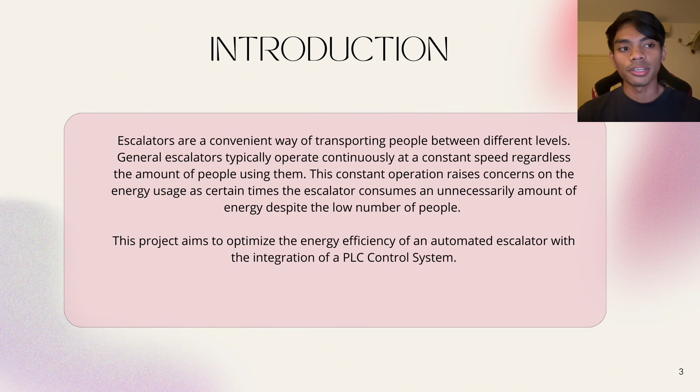At certain times, the escalator consumes an unnecessary amount of energy despite the low number of people actually using the escalator. So this project aims to optimize the energy efficiency of an automated escalator with the integration of a PLC control system. So the first problem statement is that conventional escalators run continuously, which will technically lead to wasted energy, especially during off-peak hours.

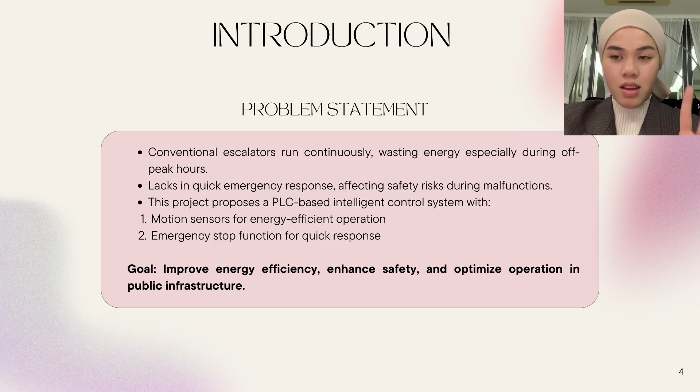So the second problem statement is that conventional escalators lack quick emergency response, which will affect the safety risks during malfunctions. So this project proposes a PLC-based intelligent control system with two features: first, the motion sensors for energy efficient operation, and the second feature is emergency stop function for quick response.

First objective, to integrate motion sensors to detect motion and activate or deactivate the escalator accordingly. Second, to reduce maintenance costs and mechanical wear. Third, to develop an intelligent control system using PLC. For design capabilities, first, motion sensors to detect user presence. Second, PLC control to ensure precise timing.

Third, timed delays prevent unnecessary restarts. Next, user-friendly reset to allow manual reactivation. Next, cost-effective and energy efficient to reduce power consumption and improve the system longevity. Last but not least, smart automation to enhance the operational efficiency.

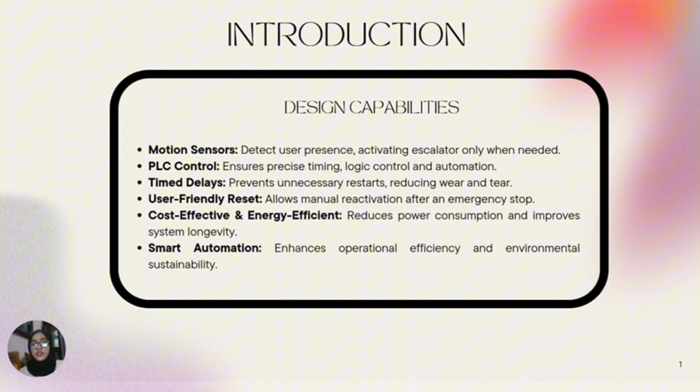So the first article, which is Programmable Logic Controllers, Principles and Applications, tells us about why PLC is a good relay system compared to the old relay system and its main parts that have been used in PLC. So the second article is the evolution of programmable logic controllers in manufacturing. In this article, it tells us how PLC has improved over time.

PLC, Programmable Logic Controllers, Principles and Application, but this time is more specific to our topic, which is how PLC technology is used to control escalators. In this article, we learn how PLC helps save energy in escalators, how emergency stop can be used, and also how sensors detect people that are coming to the escalators, which helps the escalator to move, as well as how the escalator speeds up when someone is nearby.

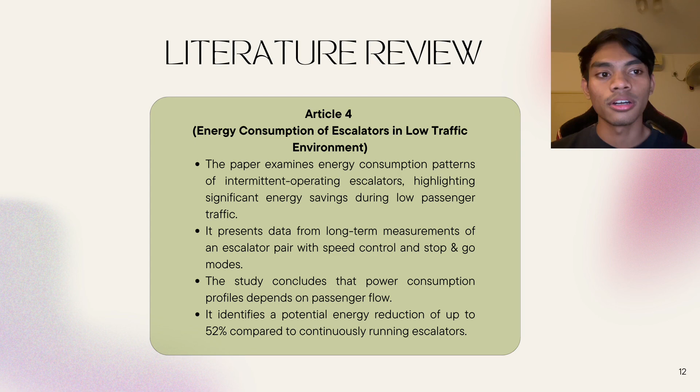So this paper examines energy consumption patterns of intermittently operating escalators, highlighting significant energy savings during low passenger traffic. It presents data from long-term measurements of an escalator pair with speed control and stop-and-go modes. The study concludes that power consumption profiles depend on the passenger flow, and it identifies a potential energy reduction of up to 52% compared to continuously running escalators.

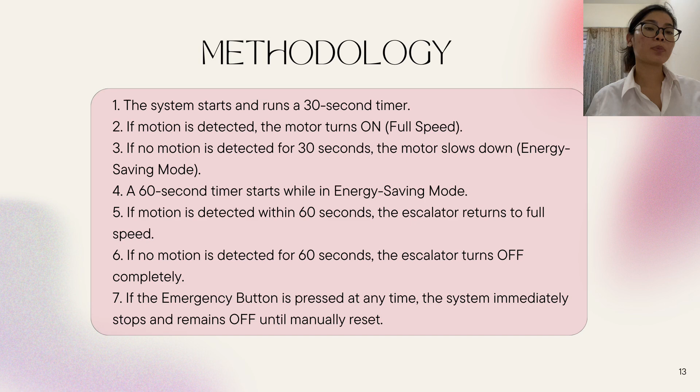For the methodology, we want our escalators to conserve energy when there is no motion detected. Of course, there will be a time interval of 30 seconds and 60 seconds to maintain the efficiency. The crucial part of the system will be the emergency button or push stop button that will be used in the PLC circuit diagram that will immediately stop the whole system in case of any emergency.

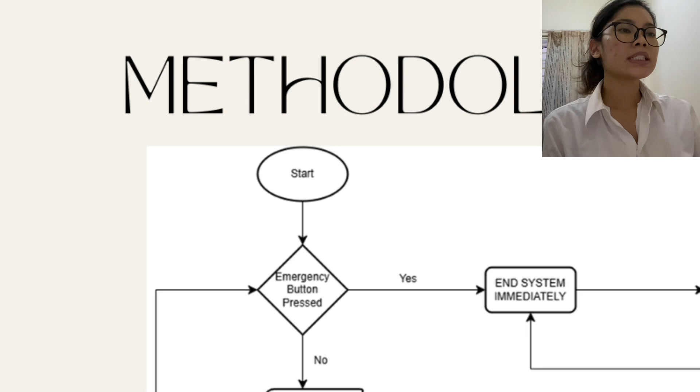Now, let's break down the flowchart which visually represents this logic. The process begins when the system starts. The first check is whether the emergency button is pressed. If it is, the system immediately stops to ensure safety. If not, the system initiates a 30-second timer before checking for motion detection.

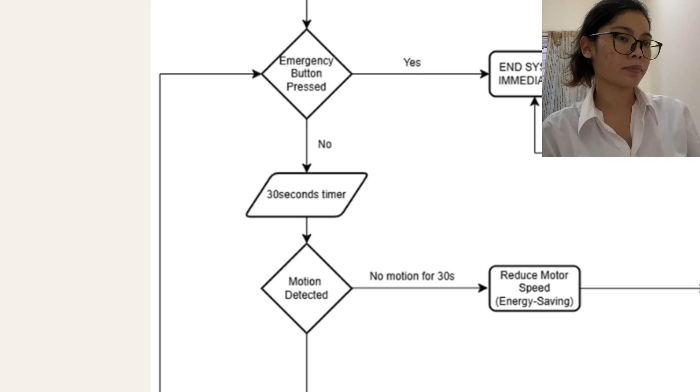If motion is detected, the escalator runs at full speed. However, if there is no movement for 30 seconds, the system reduces the motor speed, entering energy-saving mode. At this stage, a 60-second timer begins.

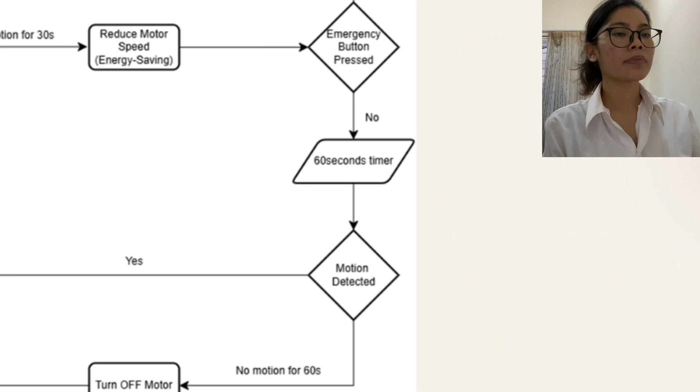During this period, if motion is detected, the escalator returns to full speed, but if no motion is detected for 60 seconds, the system completely stops the motor, conserving energy. At any point in this process, pressing the emergency button overrides all operations, stopping the escalator immediately until it is manually reset. This flowchart provides a structured approach to efficiency and safety, ensuring that the escalator only runs when necessary while integrating a fail-safe emergency stop.

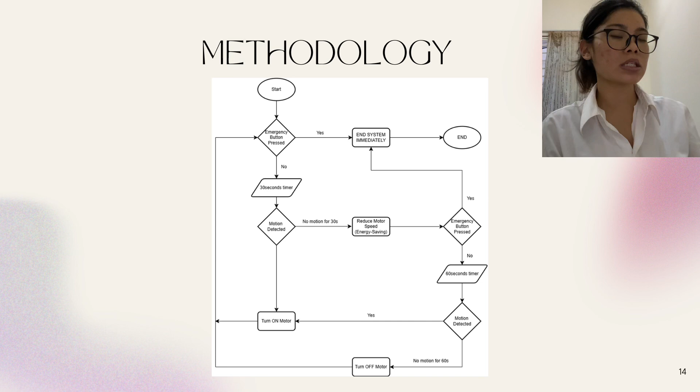Thank you. Now that you know about the working principle and the logic implemented in our PLC program through the sequence of events, I'll be presenting our PLC ladder logic design for an energy-efficient escalator control system. Let's go through the PLC ladder logic step by step.

Rung 1. The first rung contains the start button, stop button, and the motor coil. When the start button is pressed, the motor turns on, provided the stop button is not activated. The motor remains latched on due to a holding contact until a stop condition is met, which is when the stop button is on.

In rung 2, once the motor is on, you can see that a 30-second on delay timer T30 is triggered. If motion is detected during this time, the escalator remains in full speed operation. However, if no motion is detected after 30 seconds, the next rung is activated. We'll wait for a few more seconds and we'll see what happens.

Right, so now in rung 3, if no motion is detected for 30 seconds, the system transitions to energy saving mode, which is the eco mode. This is achieved by switching from the full speed motor control to an energy efficient mode. Here, you can see it has been 30 seconds and there is no motion, so it went into the eco mode.

Next, in rung 4, while in energy saving mode, a 60-second timer T60 starts counting. It has been 35 seconds here. So if motion is detected within this duration, the escalator returns to its normal speed. See? It returns to its normal speed. So if no motion is detected, the system will proceed to shut down the motor. We'll wait for around 50 seconds and we'll see what happens.

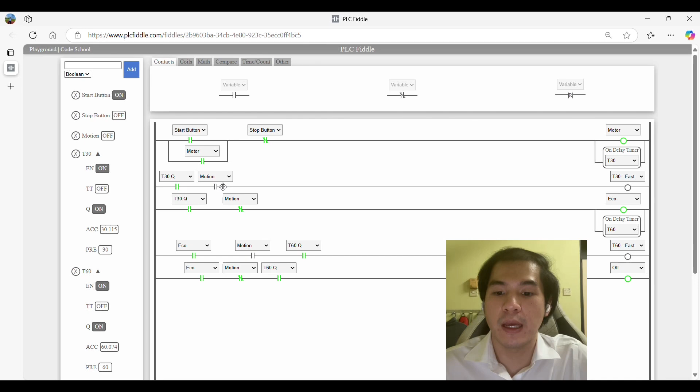And of course, safety is a crucial factor in our design. If the emergency stop button is pressed at any time, the motor turns off immediately, and the system will remain disabled until manually reset. This will prevent any accidents and ensures user safety. You see? All the motors are completely off.

Firstly, it reduces the electricity costs associated with continuous escalator operation. Traditional escalators consume a large amount of power, even when idle, whereas this system minimizes unnecessary energy consumption, making it more cost-effective. Additionally, by decreasing wear and tear on mechanical components, maintenance costs are reduced, and the escalator's lifespan is extended. The integration of an emergency stop also aligns with safety regulations, reducing liability risk for businesses operating in malls, airports, and public transport hubs.

Overall, the results confirm that this PLC-based control system is an effective, energy-efficient, and safe solution for modern escalators. It optimizes energy use, improves system reliability, and enhances user safety, making it a practical innovation for commercial applications.

In conclusion, first, optimize energy usage. Motion-based operation reduces unnecessary power consumption. Second, enhanced safety. The emergency stop function ensures immediate hazard response. Third, a cost-effective solution with lowered electricity and maintenance expenses. Last but not least, this project is ideal for modern infrastructure, suitable for commercial spaces and also transport hubs. So, recommendations for future work.

First, adaptive speed control, adjusting the speed dynamically based on foot traffic. Second, IoT and data analytics, collecting usage data for predictive maintenance. Next, renewable energy integration, exploring solar power or regenerative braking. Next, remote monitoring and control, developing mobile or web-based dashboards. Next, enhanced AI-based safety, detecting faults before failures occur. Last but not least, a user-friendly interface, touchscreen for maintenance and settings.